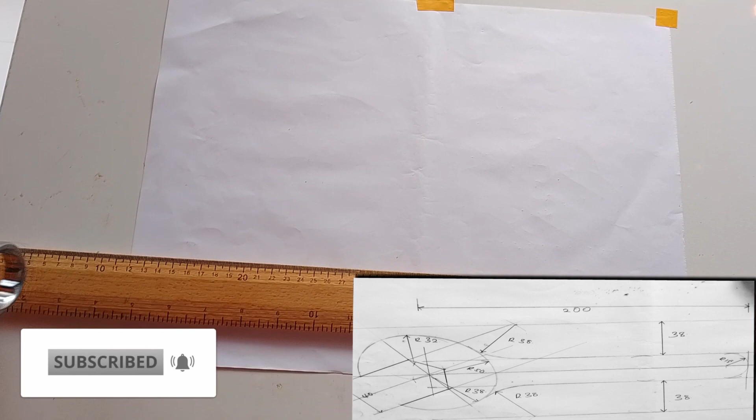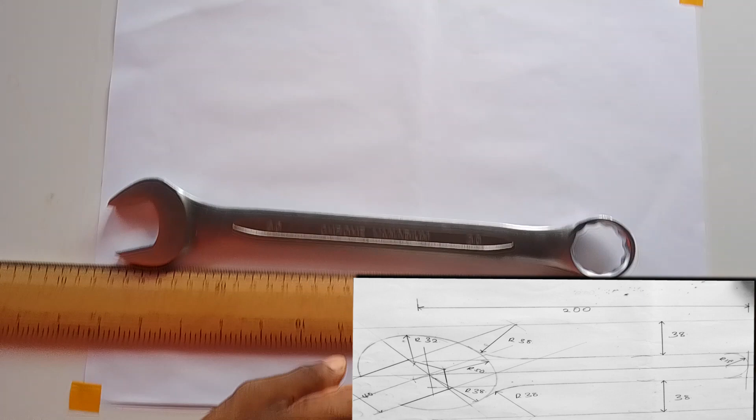Good morning students. Like I promised, I will make more videos on engineering drawing and design. Now I've brought another question: to draw and construct a spanner, and this is a sample of the spanner. As you can see on the picture, this spanner is what you're supposed to construct and draw. You're only supposed to draw these curves.

This question usually comes on tangency questions. This is a combination spanner, chrome vanadium spanner number 30. You want to construct this spanner as per the question, because we first have to construct it here so that we can go and make the actual spanner.

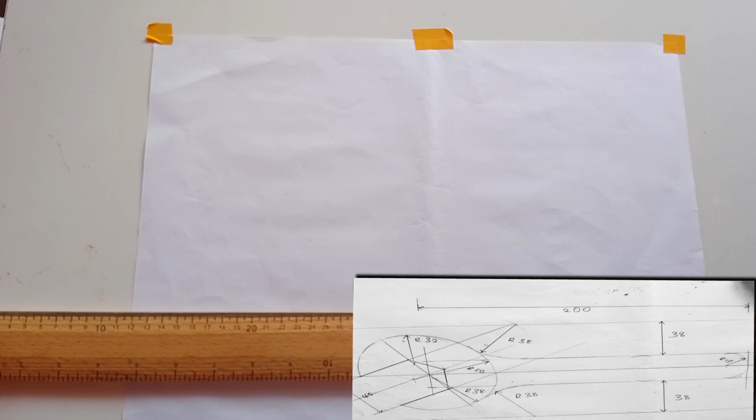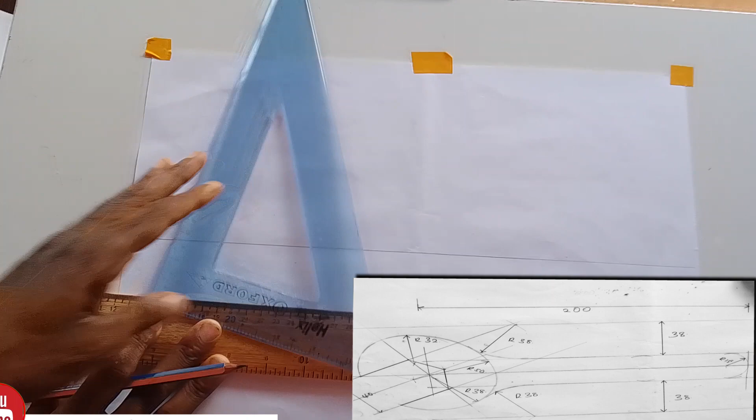It is usually a 20-mark question. The very first thing you do is draw a straight line, a reference line like that. After you've drawn the reference line, you identify a reference point where you want to construct your work. Let this point be our reference point.

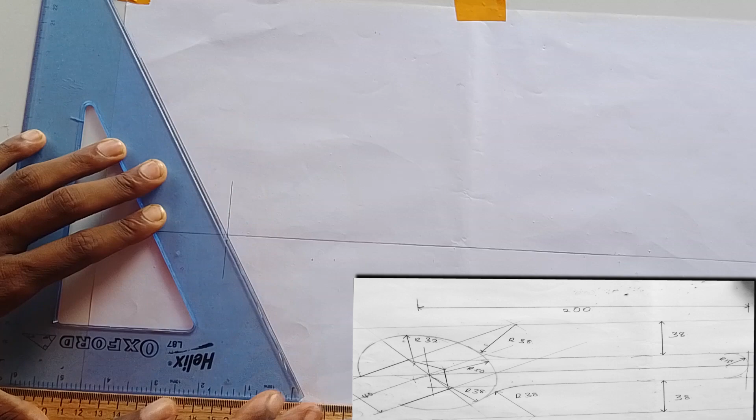The next thing you do is construct a 60-degree line like this. After you've constructed the 60-degree line, you look for the measurements.

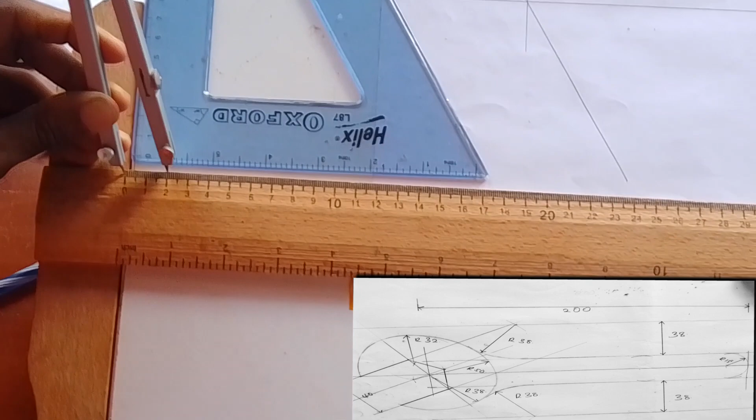We are told the measurement from the center: we are supposed to go 20 up and 20 beneath, so we have a distance of 4 centimeters or 40 millimeters. You measure your 20 millimeters on your ruler, stand on this particular point, draw a mark, then stand on the bottom part again and draw a mark like that.

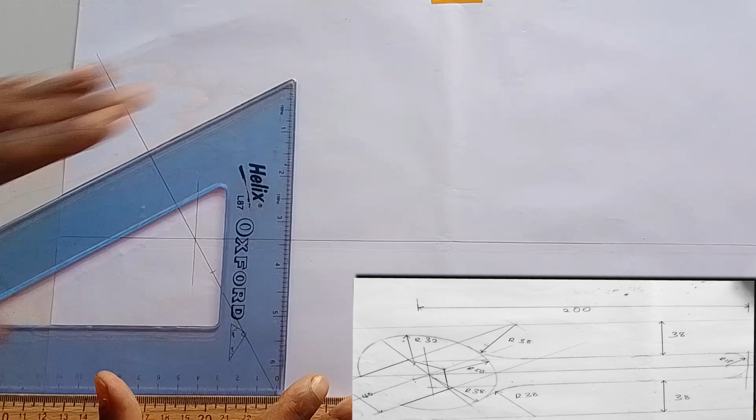From here we want to construct 30-degree lines as per the question. To draw a 30-degree line is not difficult: you just turn your ruler like that, standing from this point, and you can now draw your lines like that.

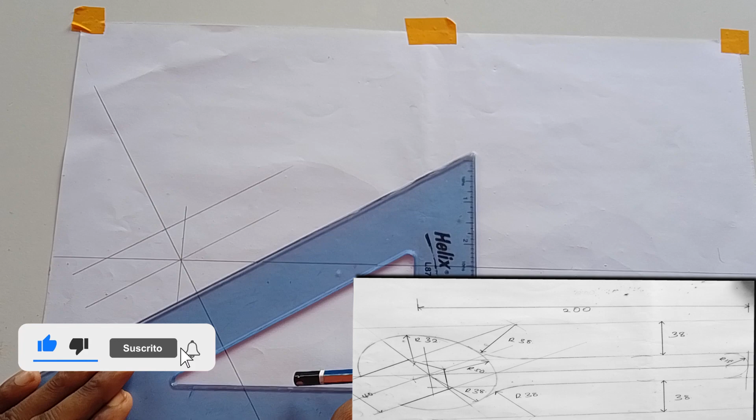Stand on this particular point again. From here, using construction lines, draw your line like that. Again from this point, draw your reference points like that. After you've done that, you've done it very well and correctly.

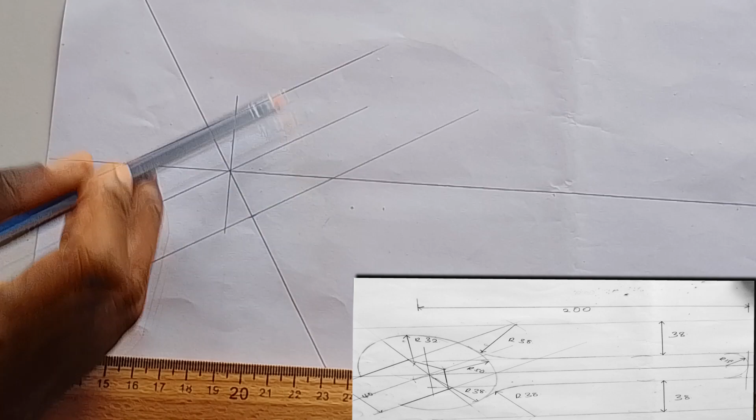The next thing you do is stand from this point. We are told that the radius of one arc at this particular point is 50 millimeters, as you can see, this is 5 centimeters.

You stand on this particular point where the lines intersect. Measure 5 centimeters on your ruler. Using your 5 centimeters, stand on this point, then make a mark on this middle line, this 30-degree line.

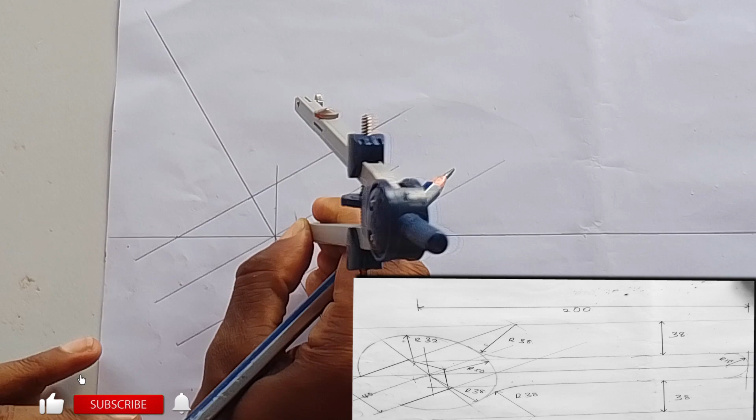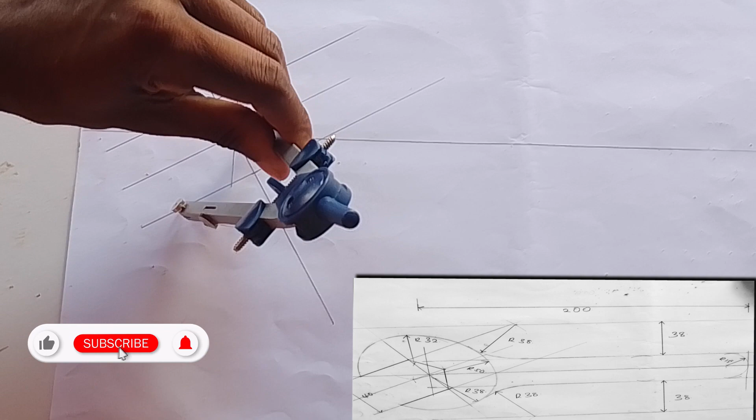At this point, we know there is another arc, which we are told is 3.2 centimeters. You stand on this particular point, and standing from this point, first you will draw something like that, then on the bottom part again you will draw something like that. After you've drawn that, very correct.

Again, we are told that at this particular point there is another arc of 32 millimeters or 3.2 centimeters. This arc and the other 50 arc, where they intersect, will form an internal curve and a curve, which are supposed to be internally interlinked.

So if they are interlinked internally, you minus. Using your calculator, you say 50 minus 32, what do you get? You get 18 millimeters. 18 millimeters divided by 10 is 1.8 centimeters.

Using your ruler again, stand here and get your 1.8 centimeters. After you've gotten your 1.8 centimeters from this point, stand at the point we identified, then strike an arc at this particular point.

Where you have struck that point, we know the arc here is 32. So measure the 32, double-check your measurements, measure the 32. That 32 you have gotten, stand on this particular point you have identified, and from this point now you draw an arc like this.

Draw an arc like that. After you have gotten that point, the very next thing we are told, down here there is another arc of 38 millimeters, linked with this 50 radius. This lane of 50 radius is supposed to form a curve, forming an internal curve.